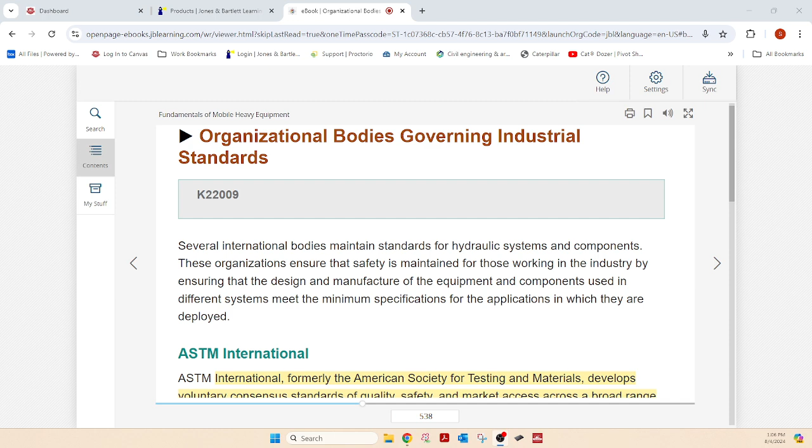Here we are, we're in week 6 of Hydraulics 101. Welcome. I want to talk a little bit about organizational bodies governing industrial standards. Some of you will be familiar with these, and then we will take a look at the actual week and see if there's anything we need to take a peek at, like the week 6 assessment.

There's several international bodies that maintain standards for hydraulic systems and components, and these organizations ensure that safety is maintained for those working in the industry by ensuring that the design and manufacture of the equipment and components used in different systems meet the minimum specifications for the applications in which they are deployed. What language, I like that.

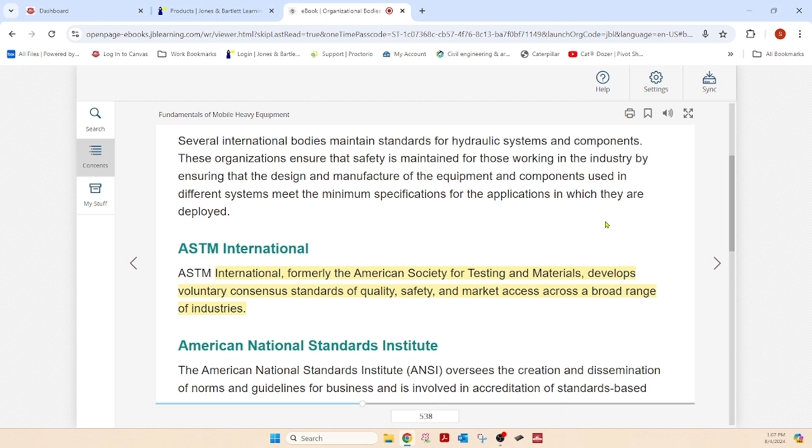So there's the ASTM International, formerly the American Society for Testing and Materials. Now these guys, they'll develop voluntary consensus standards of quality, safety, and market access across a broad range of industries.

The ASTM, they would test soils for instance. They would have standards for that, for you guys to spin through, by my basic soils class we've come across some ASTM standards.

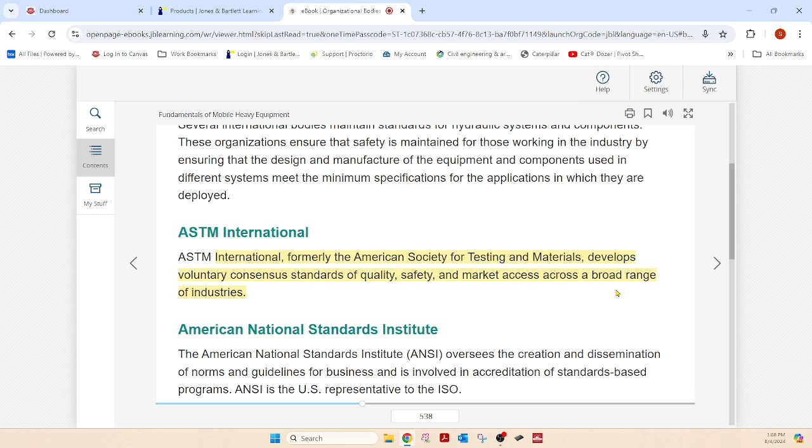And then there's American National Standards Institute to crane operators, that's ANSI. You probably become really familiar with them, as they are the foundation for pretty much all of the mobile cranes in construction standards. I forget if it's subpart P or CC, I get those two confused. But anyway, it's 1926 1400 is the rule number.

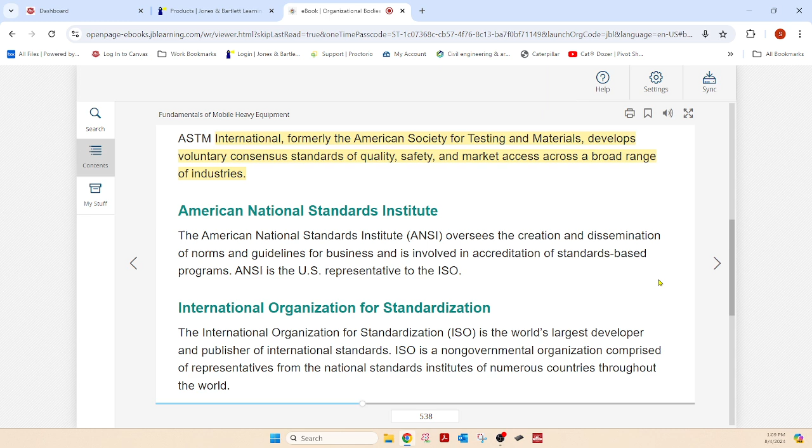ANSI is the United States representative to the ISO, that's the International Standards Organization. The International Organization for Standardization is the world's largest developer and publisher of international standards. ISO is a non-governmental organization comprised of representatives from the National Standards Institute of numerous countries throughout the world.

I'm going to ask you a question in this assessment about the number, I think I wrote it down. When you get in the assessment, it'll be ISO/IEC 17024 2012 conformity assessment. I know quite a bit about that actually.

At one time we wanted to be a part of this, certifying bodies - like everybody from food handlers to crane operators have the same standards to qualify as a certifying body. Now hold on, mobile crane operators, cooks, of course they do different things, but to be certified there is different procedures that all of those guys used to go through in different states.

Now they have decided on how to set this up. If you want to be a certifying body - CCO, or what's better known, the National Committee for the Certification of Crane Operators, known as CCO - they have complied with these standards, and I'm going to tell you something, they are rough. Just to mention a few things, you're not supposed to train the same people you're certifying.

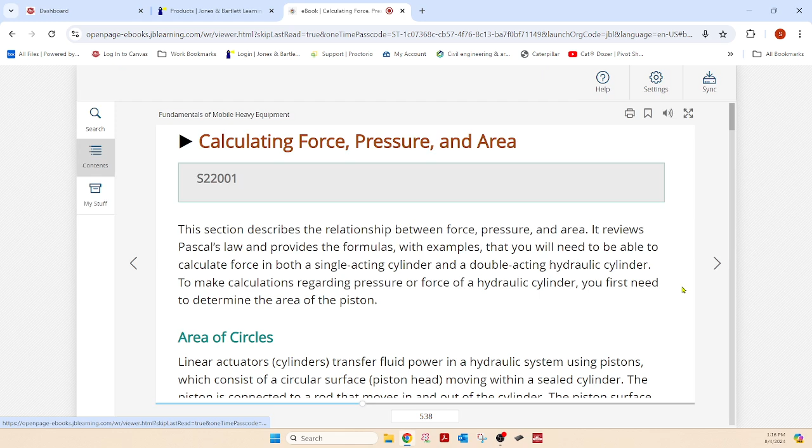Let's see, I wanted to talk a little bit about safety concerns. It's part of this module, and I don't want to neglect it. We know about hydraulic pressure when you're checking for it, we don't use our hand and things like that. We know it can get up under your skin and has been known to do serious damage to people's fingers and hands. It says those systems use hot, high pressure fluids and large amounts of energy, and can do personal harm, and it can occur quickly if you aren't proactive in preventing it.

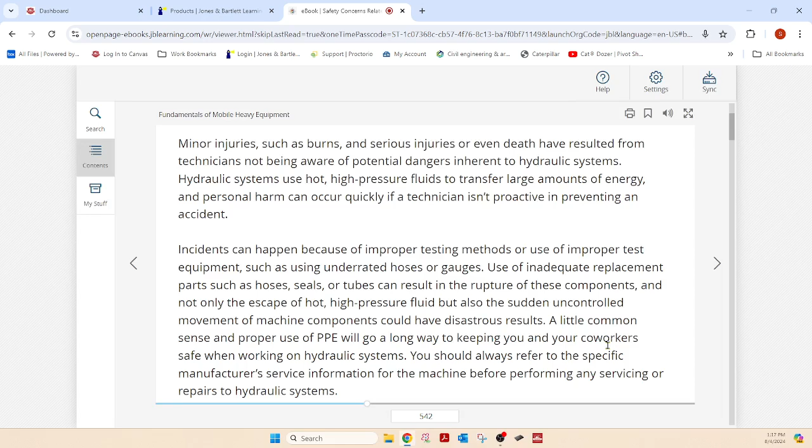Rubber gloves, for instance, checking for leaks with a piece of cardboard. So they're talking about improper testing methods or use of improper test equipment, such as using underrated hoses or gauges. Use of inadequate replacement parts, such as hoses, seals, or tubes, can result in the rupture of these components, not only the escape of hot, high pressure fluid, but also the sudden uncontrolled movement of machine components, which could have a dangerous result.

I have a story. I put in a lot of fiber optics all over the place. You plow conduit in the ground, and then you blow fiber optic through that conduit. Well, that plow we had had a 6-inch hydraulic attitude adjustment, like the blade on a dozer has an attitude adjustment. That component exploded, the seals just blew out of it, and there was no preventing that. I'm just talking about the impact of it. There was usually a plow foreman back there, and when you're burying direct copper, you don't want it to scrape against the plow boot, so you got a guy pushing it instead of it being pulled down in there. So he's back there with me. That thing blew up, he jumped, and was on the side of the road, jumped into the traffic lane, and got hit by a car. It was amazing he came out of it, knocked up in the air, but came out pretty much unscathed, just probably needed a change of underwear. Sorry about that, it just occurred to me.

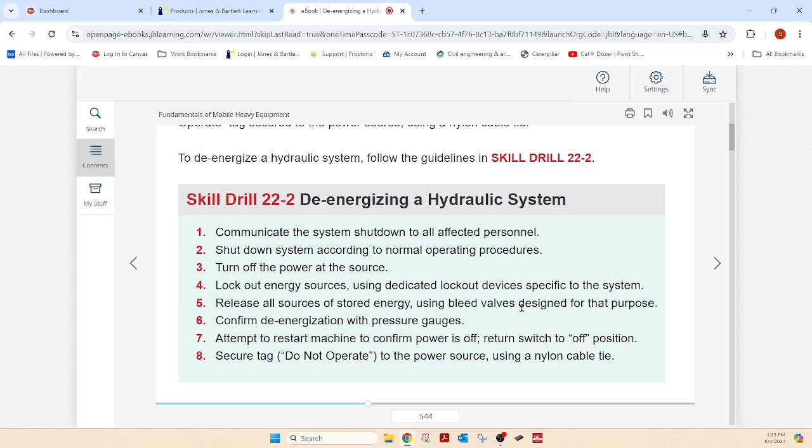This is when you disconnect the battery or disarm it - you want to make sure it's all done. Here's actually what you do: communicate the system shutdown to everyone affected. Shut down the system according to normal procedure. Turn off the power, lock out energy sources. Release all sources of stored energy using the bleed valve. And confirm de-energization by attempting to restart the machine to confirm the power is off.

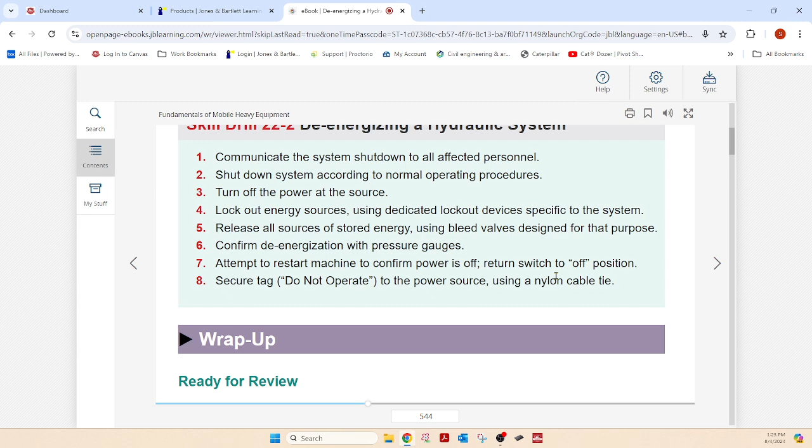So I'm glad we just went ahead and went over that. Let me try to get, I think I can do it here. I'm going to go to the... if it's not up there, here.

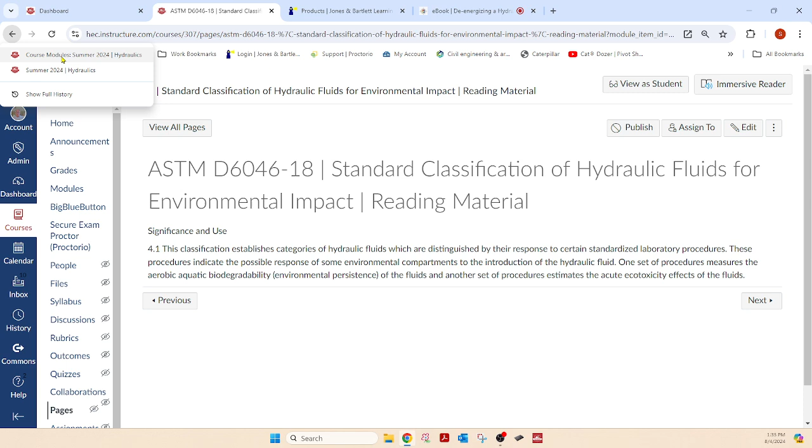Okay, looks like I've covered much of everything. I guess it's not fair if I don't take a peek at the tailgate.

So it says there's this video, and it says the video below is about safety concerns while working with hydraulic systems. Oh, I remember this—I think it's focused on landfill operations. However, those operations use as much, if not more, heavy equipment as earth moving. So relying on comments, ideas, and replies that you get from this video, put together a safety plan based on your observations in the video.

A safety plan—you'd Google what's a safety plan. It's a structured thing, and see if you can outline it: safety plan for heavy equipment, safety plan for hydraulic systems, anything like that. Just don't blow it off, you know.

So I'm asking you these three things. I suggest while viewing, make notes on preventive measures and include them in this topic. So include things from here in your safety plan.

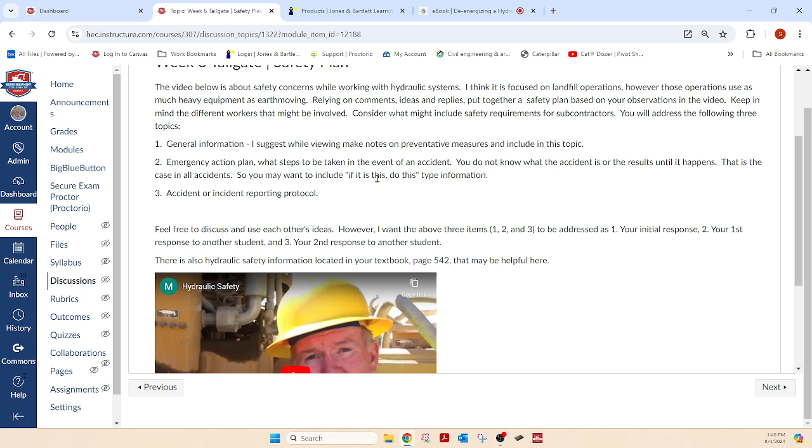General information, the emergency action plan, and the 'if it's this, what you do'—if you have time, define some things like that to put in here. It's probably not going to be in the course; you may have to do a little googling to get this, and could probably google a safety plan.